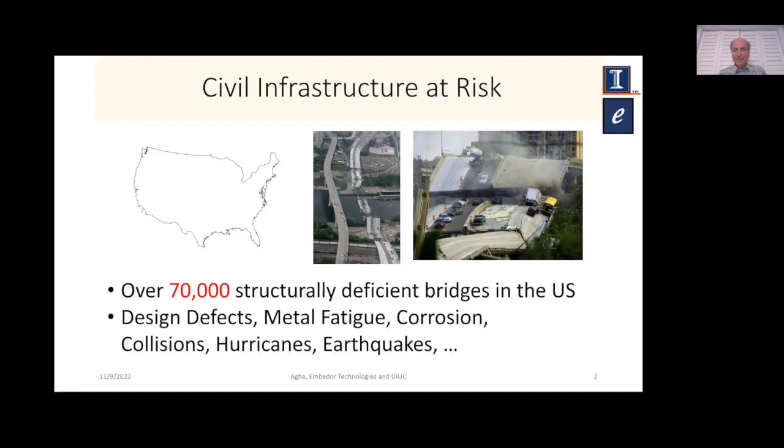Sometimes there are design defects. Over time, there's metal fatigue, there's corrosion, collisions, hurricanes, earthquakes, all kinds of stresses on these systems. In fact, the American Society of Civil Engineers, because the infrastructure is aged in the US, assigns grades to bridges, and the overall grades are pretty low because the US infrastructure in particular was built after World War II.

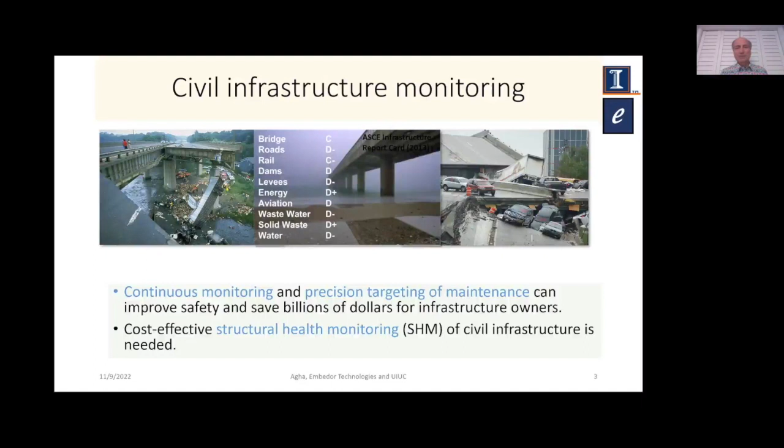But it's a problem around the world. As you know, bridges have collapsed in Italy and India and in many other countries as well. So what we want to do is to continuously monitor and precision target, figure out where the problems are by turning these structures into smart structures. And we believe that if we can cost effectively monitor the structure continuously, then we can identify problems and improve safety.

So our first major project was in Korea, actually. We instrumented this bridge with an army of sensors and got a lot of publicity in The Economist, in New York Times, and other press. And basically, it turned the bridge into a smart structure. So the bridge could monitor itself through these sensors and notify us when there was an issue.

In fact, there was a hurricane during our deployment. So this was an experimental test deployment for about an 18-month period or something of that order of magnitude. And what they found was that there was a typhoon that went through, and we were able to actually record the response of the bridge to the typhoon.

So let me set a timer here so I know the time.

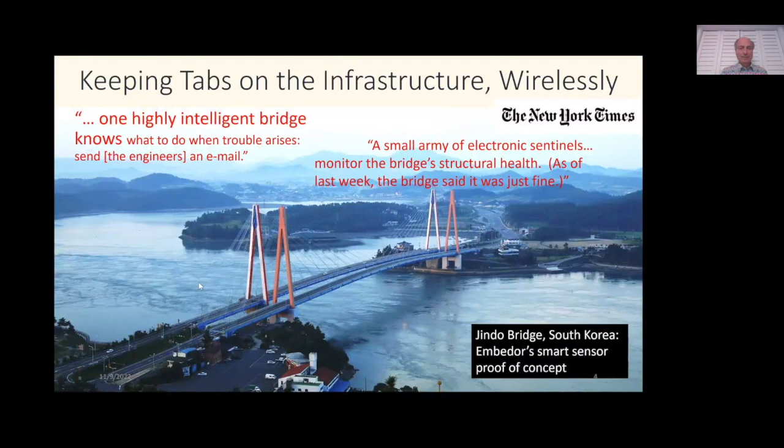Right. So this bridge was able to actually tell us how it was doing and responding during the typhoon. Sorry. So how do we turn infrastructure into smart infrastructure? As we did with this bridge, if you attach sensors to devices, objects and structures, elements that are connecting and so on, then you can tell how the performance is.

So for example, in my condominium, I have leak sensors next to every sink and every appliance. And this leak sensor then can transmit data. It figures out if there is water anywhere, because I'm up on a high floor, so I don't want to cause damage to lower floors when I'm gone. So it sends smartphone notifications if there's any leak in the washing machine or in a sink or some pipe.

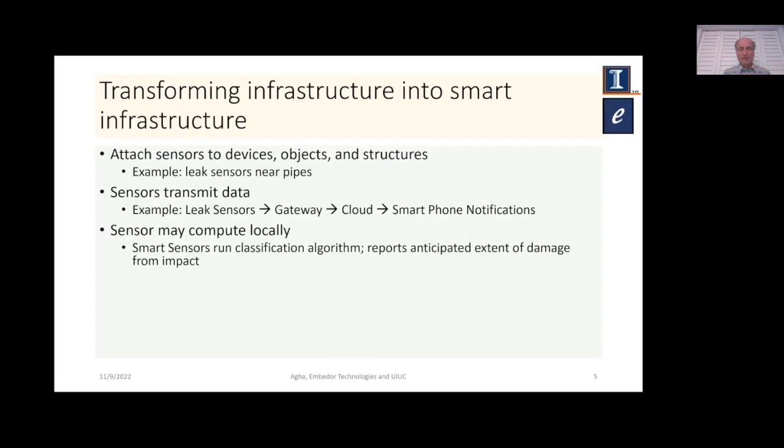These sensors may compute locally, so they may run classification algorithms and report anticipated damage, extent of damage from different events. They can also network, and so in case of, say, the typhoon with the long span bridge, the sensors could talk to each other and see how they were responding relative to each other, and this kind of correlation can help estimate the behavior.

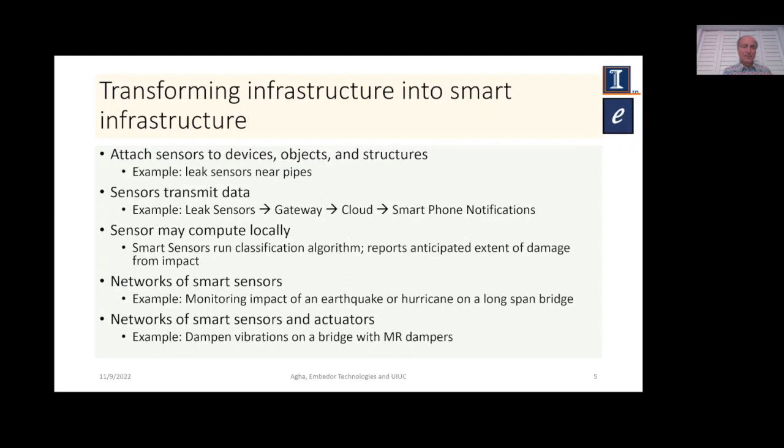And we, in fact, have done a research project. Much of what I'll talk about today is stuff that we've actually deployed and developed and is ready for commercialization. We also have done some research in damping vibrations on bridges using these MR dampers, and there we would connect sensors to actuators and actually prevent damage from happening in case of typhoons and earthquakes and so on, to the extent possible.

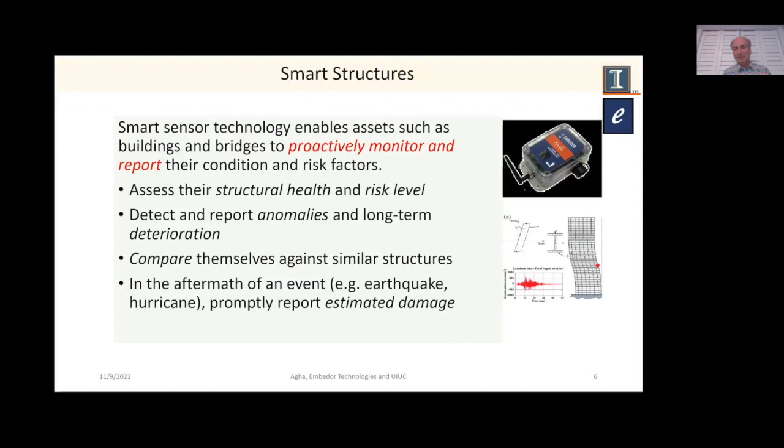So what does a smart structure do? It can assess the structural health and risk involved. It proactively monitors the condition and the risk factors. It can allow you to then take the data, compare it with similar structures, and when there is a catastrophic event, such as an earthquake or a hurricane, it should be able to promptly estimate the damage.

Now, there's a number of programming challenges in sensor networks, and these programming challenges are that these sensors have limited onboard compute capabilities, so you have to use them efficiently. You have limited energy availability. In case of, for example, this Jindo bridge deployment and other deployments, we've used solar panels, and these solar panels charge the sensors, but then you have to be very careful in terms of the management of the energy.

We had one deployment in Dubai, and in this case, the temperature becomes so hot that it's unsafe to charge. You only have a couple of hour window in the morning. So you have to diligently manage the energy, because if you let the energy go to zero, then you can't talk to the sensor.

And you also need to be able to charge it effectively to get the sensors to work. So you have to do time management on the sensor and things of that sort. There's low communication bandwidth. You need real-time communication. Data becomes obsolete. These are some examples of the programming challenges.

We use a number of techniques. One of them is edge computing, because centralized algorithms are not scalable. Networks can be slow, and you can be in remote areas. You might have very reduced bandwidth if there's a citywide emergency and you have tens of thousands of installations of sensors on different structures.

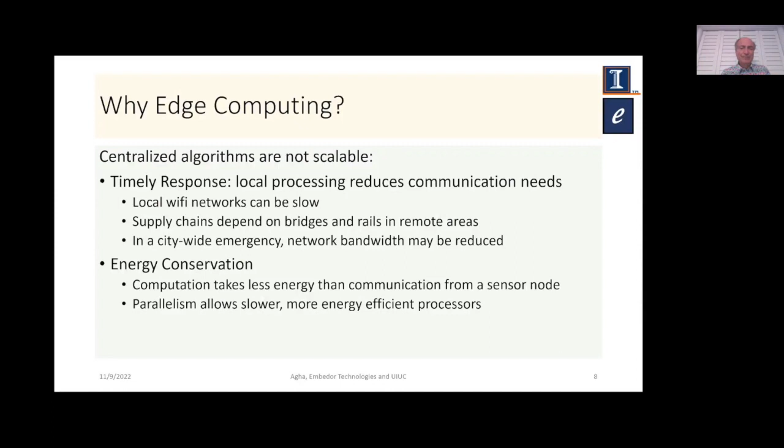Just to give you an example, Berkeley did a project on the Golden Gate Bridge, and it took them 10 hours to transmit 80 seconds of data. There wasn't any local processing happening. In the 10 hours, there's a huge battery problem in terms of charging it, and it could very well be that you run out of energy.

In the case of the Jindo Bridge, we had twice as many sensors, maybe 107 nodes, and what we did was decentralized data aggregation. Communication happened locally in communities, and then the information was transmitted and processed. This kind of distributed computing allowed us to transmit the data within minutes.

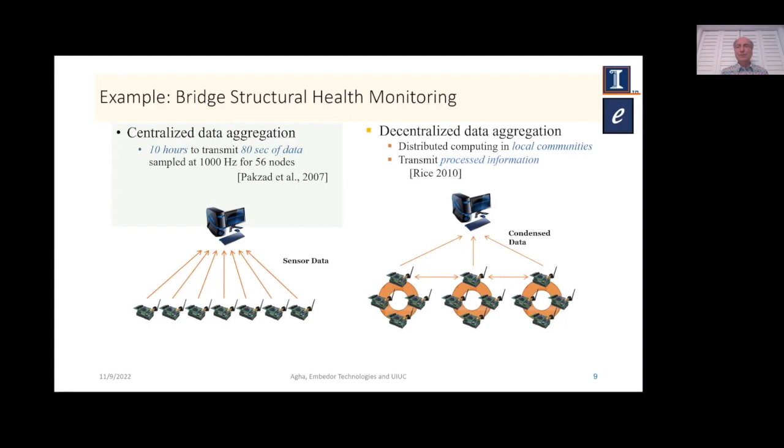My personal background is in computer science, and I developed the actor model of distributed computing that a number of people have worked with. This book was the classic book on actors, published by MIT Press. It's been used for Twitter and Facebook chat and LinkedIn and a number of other systems. The Orleans framework is an actor framework in the Azure cloud for Microsoft. And there are languages such as Erlang and Akka, a framework in Scala.

This kind of framework allows you to think in terms of distributed computing. And thinking in terms of this, we can develop services. These services provide the ability to put together different applications very quickly. Some services are foundational, for example, reliable communication, time synchronization, numerical libraries. Other services have to do with the network.

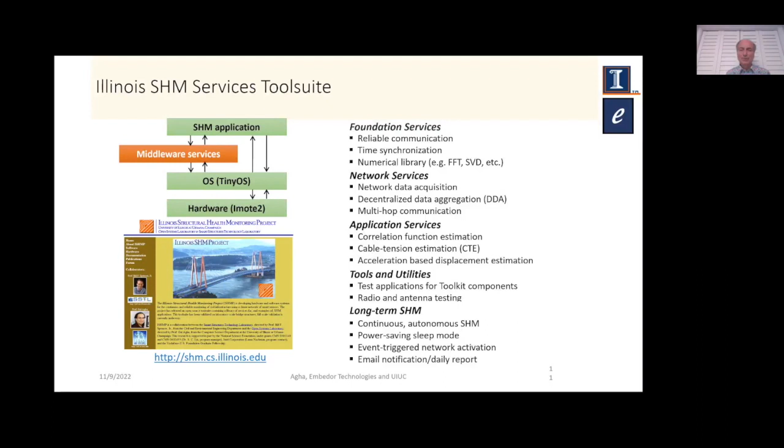Then there are application services for structural health monitoring, correlation functions, cable tension estimation, and displacement estimation based on the accelerations. We have a number of test utilities, and then there are power saving modes, reporting, and things of that sort. We did the earliest work in TinyOS. Now we use essentially a version of Unix to do our work.

I'll give you an example of a few of these services. Clock synchronization is one service. You have a beacon that exchanges time, but there's an error based on variations. You get a clock drift. Also, your processing is asynchronous. Even though the time of flight for a radio signal is negligible from the point of view of what we are recording at 100 hertz or something,

we can get down to microseconds, but the operating system is not a real-time operating system because that would be very expensive to have. So there are asynchronous delays, and we have to develop techniques to overcome that. Clocks drift over time. If you keep resynchronizing constantly, you're going to use up energy and the sensors' time. So you can do clock drift estimation.

We did frequency scaling, and frequency scaling sometimes leads to losing the clock synchronization. The frequency scaling is to save energy, so things have to be done in a way that carefully manages the energy to provide the right precision and error tolerance.

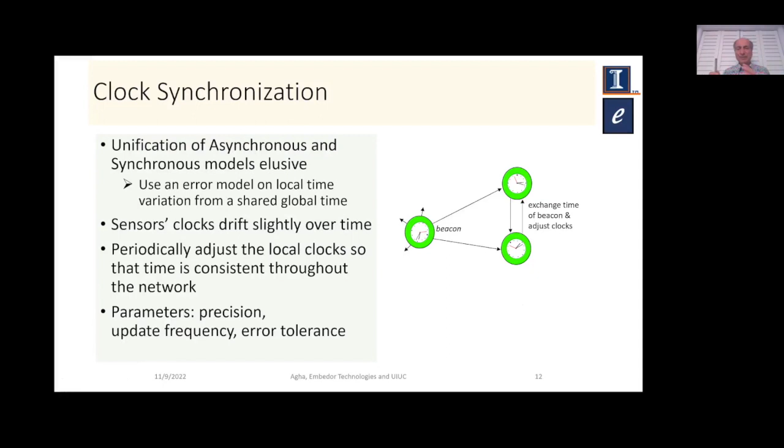After this synchronization, there's also data synchronization. For example, if you have a wave going through and you're trying to correlate two sets of waves from sensors that are nearby, you can use the physical structure to figure out errors in the data in the time domain. And we've done that.

There's fault tolerance. Large numbers of sensors means that you're going to have faults over time. So it becomes necessary to follow these faults and be able to cope with them.

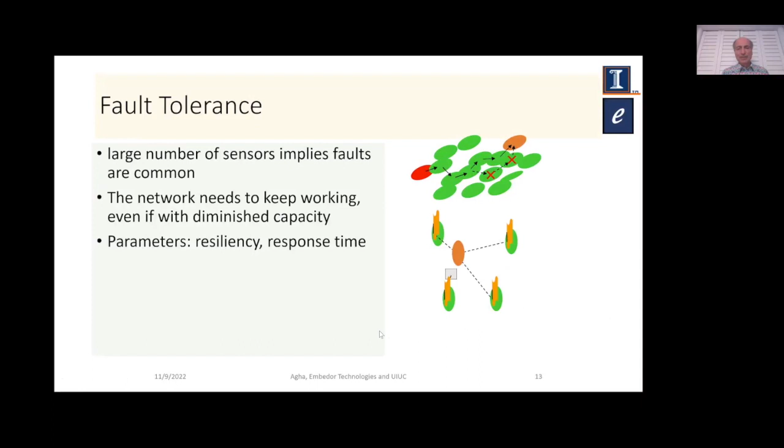Data aggregation is another key one. You want to process, for example, classification algorithms to compress the data instead of sending all the raw data, especially for a timely response. You can process this data, send off a response, and if data is needed for audit purposes, you can store it locally and send it when it's convenient, when you have enough energy or bandwidth.

This means running the classification algorithm locally on the sensors. That's why they're smart sensors and not just sensors getting the raw data. In other cases, as I pointed out, for the coordinated computing aspect, we use correlation function estimation. In the Jindo Bridge, we did distributed computing. This can create orders of magnitude efficiency.

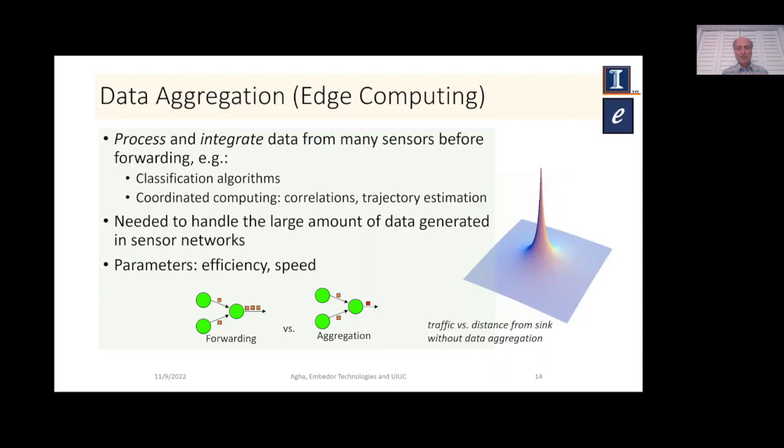So we developed these solutions at the University of Illinois, and then we wanted to get them used in the real world. So we founded Embedor Technologies, a startup with my colleague Bill Spencer and my former graduate student Kirill Mechitov, who got his PhD with me and is working on the team.

And so we've been working with these solutions now for a number of years. The project started around 2001-2002 timeframe at the university, and about 14 years later, the last 6-7 years, we've been increasingly commercializing different solutions. Some of these images you see here are in fact some of the deployments we've had, pairing real-world experience with the SHM research.

So what is the goal of IoT for structural health monitoring, and what is the value proposition that you would want a startup to do? You want to predict structural problems using real-time and historical data. This is something I hinted at right at the beginning of the talk. You want to prevent damage, so preventive maintenance, figure out where there might be potential damage or weakness. And this will help you enhance safety.

So if you are monitoring continuously, you can send notifications to engineering personnel or whoever the gatekeeper is, the traffic engineers and others. By providing an expedited response, you can also say things are safe after a catastrophic event, or things are not safe, because inspecting every structure after a catastrophic event, if it's a widespread event, is a very labor-intensive process that can take a very long time, and basically shut down important infrastructure for your transportation requirements.

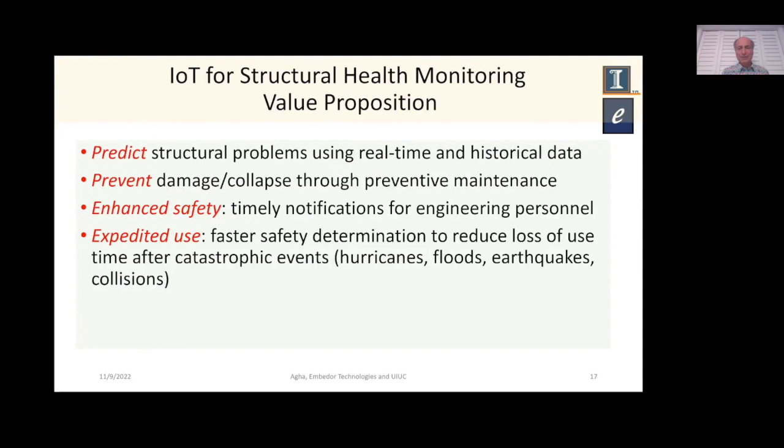So some of the examples of deployments we've had are rail and highway bridges, the world's largest Ferris wheel. Any large structure, any large physical structure, we can instrument that has vibration or strain or other sort of sensing that can tell you there might be a problem. During construction, they instrumented this Ferris wheel, for example. The Jindo Bridge that you see, a bunch of other bridges we've done. One of them is shown on the left, a train bridge in this case, truss, both wooden and steel.

And we've also instrumented buildings for earthquake damage, in this case, in partnership with Zurich Insurance Group. We have a global partnership that we're working with.

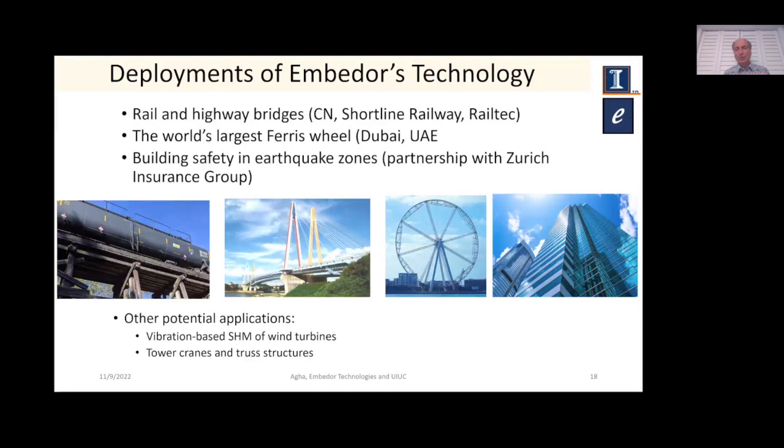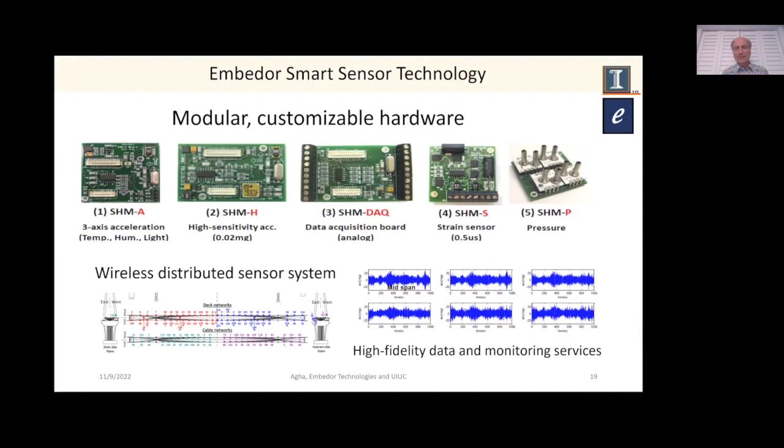So what is the technology? Well, the technology has got several parts. There are sensor boards, and these sensor boards are getting acceleration and certain other things like temperature, humidity, light, and so on. So you can adjust your sensor readings based on local conditions, which can affect it. For example, if you were trying to get the cable tension, you know that the temperature is going to affect the cable. So knowing the temperature locally at that point is important, and the sensor can help you do that. We have also developed data acquisition boards, strain gauges, pressure sensors, and we can provide these readings. So there's this customized hardware that's been developed, and this allows us to do wireless communication through a radio board, and provide high fidelity monitoring and data acquisition.

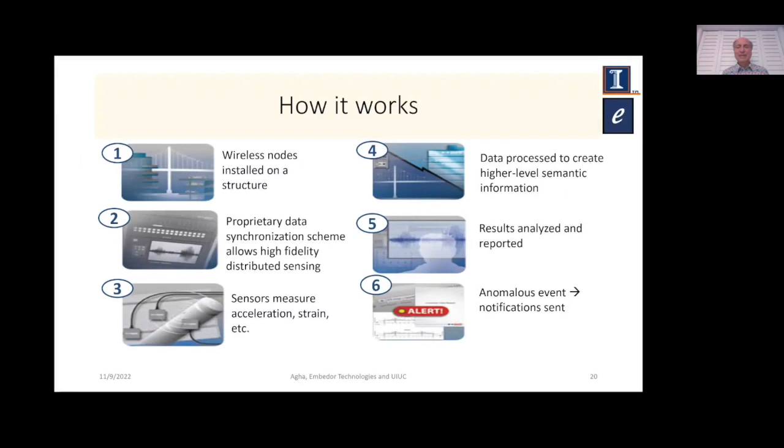So essentially, there are 6 steps to our process. You take the wireless node, so you don't have issues of wiring, and install them on a structure. These can be installed via magnets or screwed in if the structure allows. Obviously, in a bridge, they don't want us screwing in things, but we can use magnets that attach to the steel structure. Then we use data synchronization schemes and high fidelity distributed sensing. Sensors can measure acceleration, strain, etc. We process this data to create semantic information, analyze the results, and then if there are anomalies, we send notifications to the right parties. So that's the basic idea.

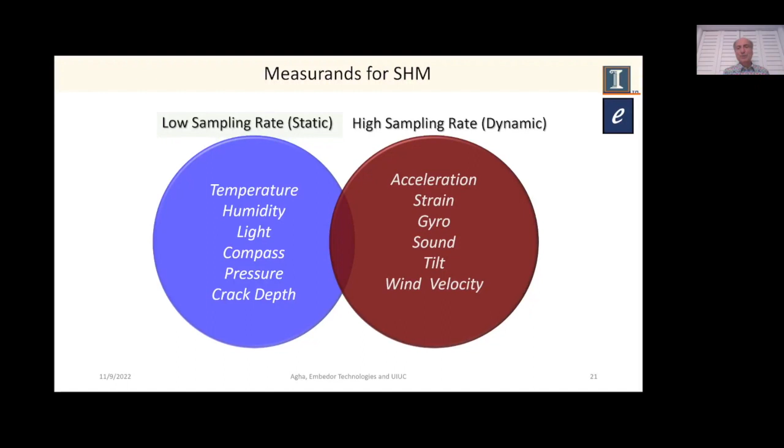And here are the 2 types of measurements: things that have to do with statics, temperature, humidity, light, compass, things of that sort, which do not depend on the motion or changes in the structure, in the movement of the structure. Then there are others which have a higher sampling rate, more hertz, more data, things like acceleration, strain, and so on. Wind velocity was something that we were recording locally, and in fact in the typhoon, so we knew exactly how much wind hit that bridge in Jindo.

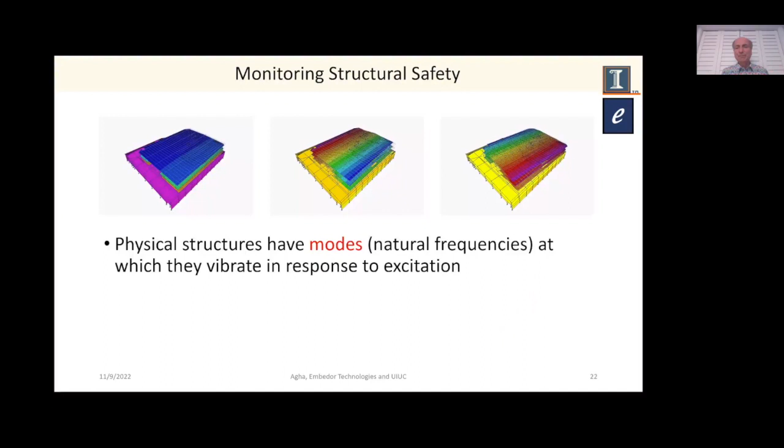So monitoring structural safety, basically you look at the physical structure, and every physical structure will have modes. These are natural frequencies of movement in various dimensions. If it's a building, you'll have these three movements. If it's a bridge, you'll have up and down movement as well. Buildings are fairly grounded, so up and down movements will be relatively minor. So in response to any excitation, you'll have these physical movements, and from these movements you can make estimations.

And if things were responding as they were supposed to, you build a model of the structure - in this case the cable tension has a simple model and specs, and you can see if things are following the specs. Then there's more complicated models made of the individual elements. These elements you can build computationally, the dimensions, the mass, stiffness, and they do this at design time. Based on the structural plans, though, what actually happens may not reflect the behavior of the structure.

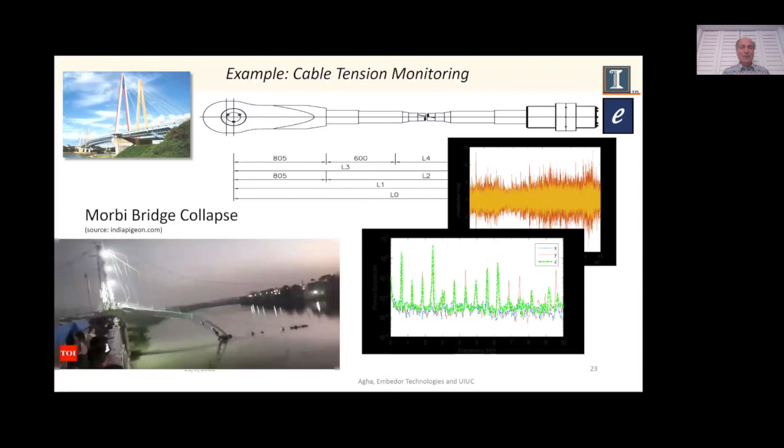We don't know for a fact, but I imagine the engineering firm, the design firm that planned the Morbi Bridge had certain estimations of the cable tension, of the weights that would go on it, and how the movement would be. However, the reality can be quite different. Because of flaws in the construction or whatever other issues that might arise, poor materials or weight limits that are getting exceeded, you can have behavior that does not accurately reflect the model.

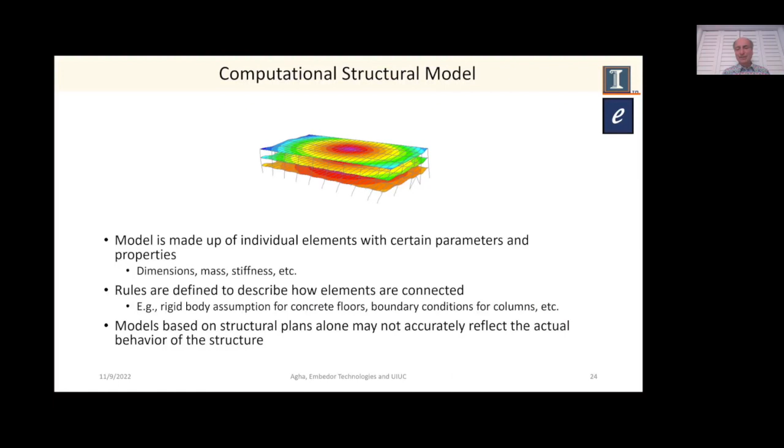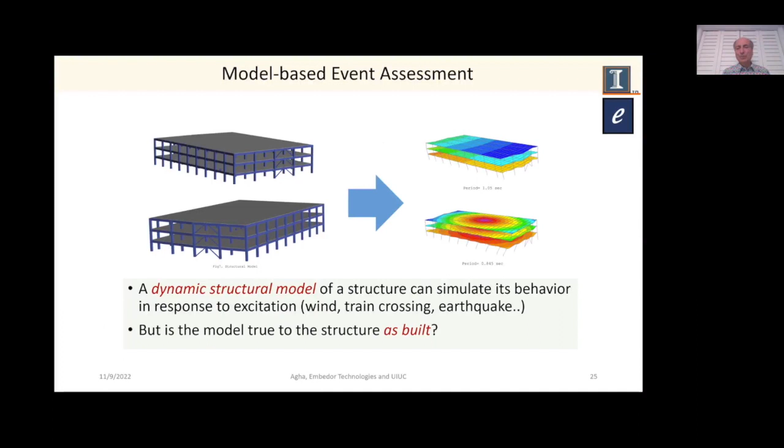The model does not necessarily reflect what the structure is. So what we do is then we can do the dynamic excitation. We can see with wind or train crossing or earthquakes - we can simulate what the response should be and see if the model is true to the structure as it's built.

So what this does is allow us to update the model and say, okay, really what the bridge is doing is the following, or here are the issues, or with the building, it's not behaving as it should. It should have been more rigid, or it should have been less rigid. And so in response to just a high wind, for example, its behavior is not what it should be.

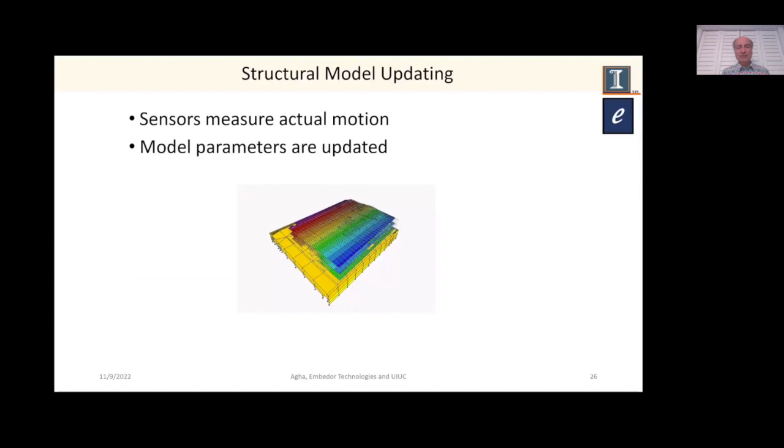These are what the model parameters instead look like, and therefore you can propose things that say something about the state or the condition of the bridge. So we can do this at any point in time - look at the displacements, look at the measurements, and we can track changes over time. This could be periodic measurements, or it can be event-triggered measurements, and then look at significant events that are changing how things may behave.

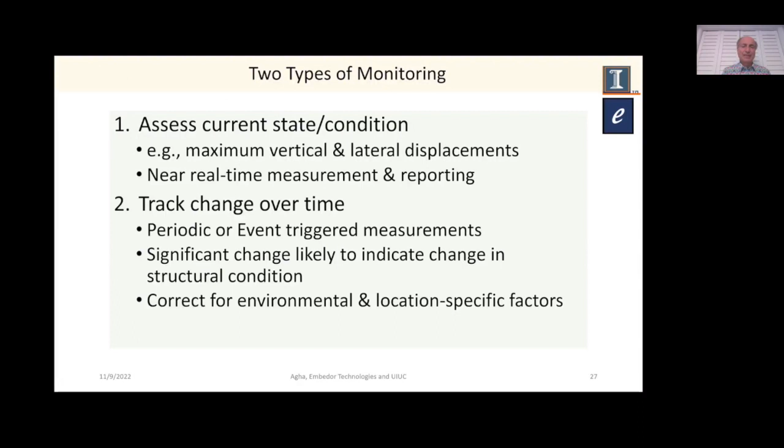These significant events can cause dislocations, and these dislocations in the structure can then be detected as issues that have cropped up. You have to correct for environmental and location-specific factors. I mentioned already, for example, the temperature will affect how the cable is behaving. So these kinds of factors, if sunlight is shining or things of that nature, seasonality - they will have an effect.

Now, energy, as I mentioned, is a key factor. Let me give you - and this will lead to the final example that I will present in my talk. You have events that are being triggered, but you cannot afford to not sense in response to, for example, the typhoon, or if there's an earthquake. We've had sensors when there's an earthquake, and we said what the response of the structure was. We have deployments in Mexico City, for example, where there are frequent earthquakes, and we then can say how the structure did.

So if you have the sensor on continuously, then you have to power it. But some of the deployments will be out where there is no source of AC power. Even if there's no source of AC power, some earthquake could wipe out a station, or other reasons, a hurricane could wipe out a station. And then you want to go into a mode where you're not constantly having the sensor on, because it will consume power, and within a few hours, you won't have any sensing capability.

So what we have done is to create a low power trigger sensor. And what this low power trigger sensor does is continuously record data. This data is just recorded for a small amount of time, say 80 milliseconds, and then it's a continuous buffer, so it doesn't store the data.

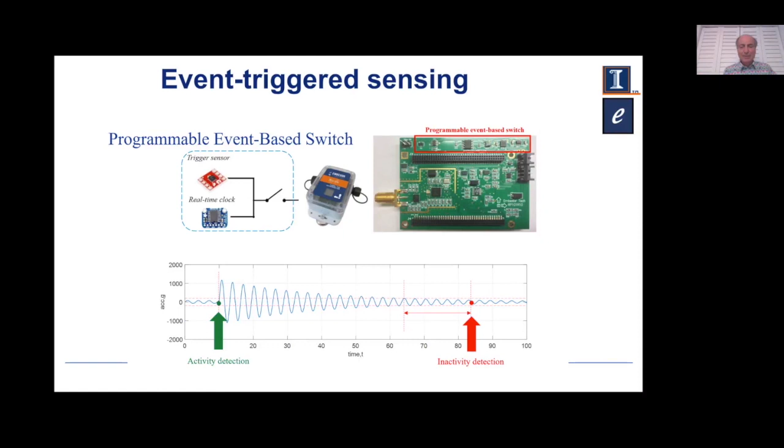So this small window then wakes up, so the data from this trigger accelerometer, and then the high fidelity data. So we get this triggering behavior.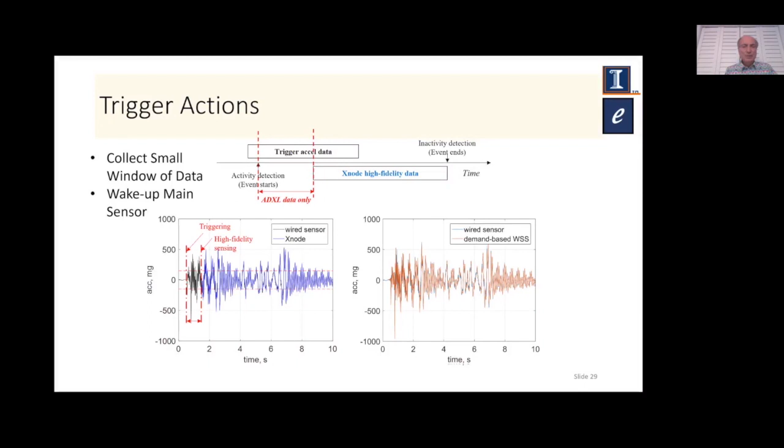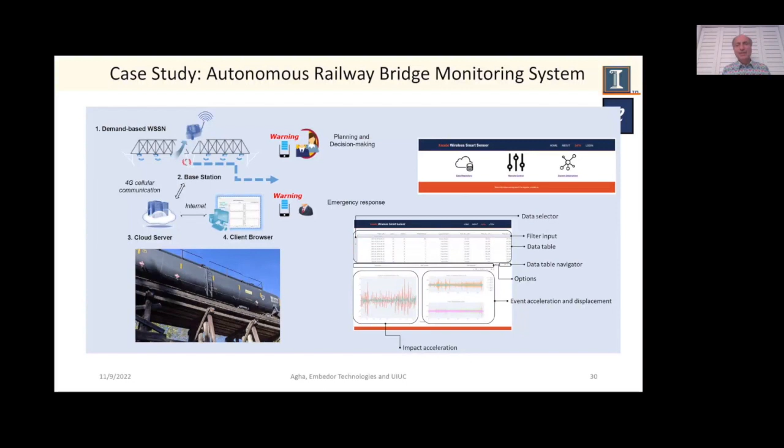So we've used this in railway bridge monitoring systems. If a train is coming by, you want to trigger the accelerometer—it's in the middle of nowhere, and say a train is coming, let's start recording and see the response of the bridge. So one case study was this autonomous system to record the rail bridge behavior with wireless sensors, and if something happens, you would trigger the emergency response.

In this case, we also use strain sensors. What strain sensors can do is tell us about the track condition, because you can measure the strain. If there's some issue with the wheels, you'll have the vibration data as well as the strain data. In fact, you can even measure the load of individual train cars as they pass by—if it's been inaccurately recorded in the manifest, you'd be able to detect it.

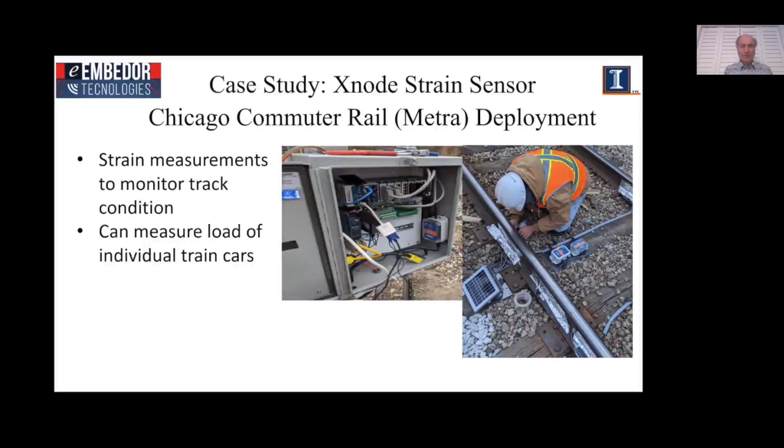You can see our sensors, the blue boxes on the ground there, and in the box on the left. You can also see the solar panels. So there's the installation—this was done on a commuter rail line in Chicago, where we are situated.

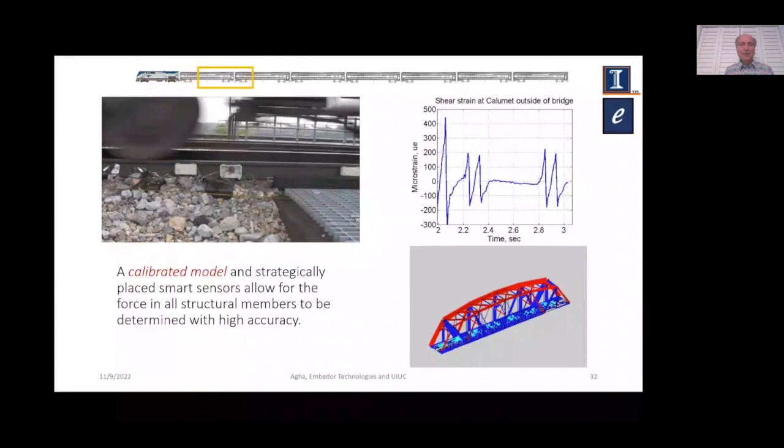As the train is going by, the accelerometer is triggered, and you can record—in this case, it shows the shear strain at the Calumet Bridge, just outside the bridge. The recording is being done, and this tells you what the force is on each structural element.

You have these sensors all along, and you can tell what forces are being applied and how the bridge is responding. Here's an example of a different steel truss bridge, and we marked in red the places where we were doing recordings. We found that some members, shown on the bottom right marked in red, looked like they had issues based on the sensor data. The inspection report showed that the truss on the west side had multiple members with section loss, while the east side had no loss. So we could compare the data of the two sections and identify the problem—a 15% loss, 40% loss, 15% loss—and that tells you exactly where to reinforce it.

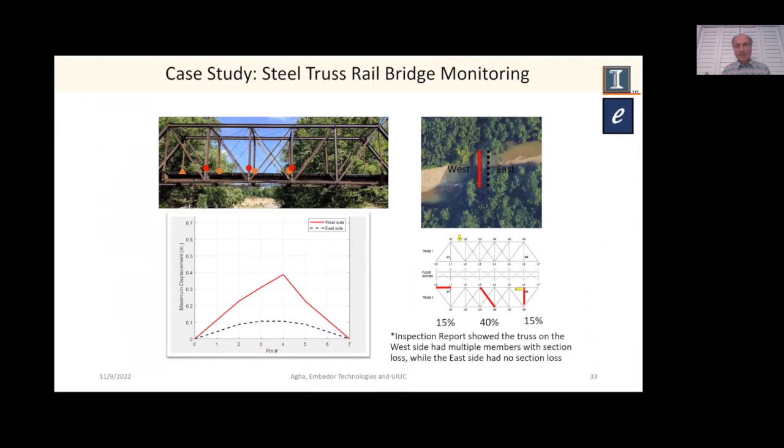This is being done continuously, so we can tell what's happening. We can look at the displacements over time and see if they go above a certain level. Green means everything is fine, yellow means it's in a problem zone, and the red zone—showing up pink on my screen—means it's dangerous and things should perhaps be shut down. We take multiple measurements, use statistical methods, and compare different behaviors of the bridge on different sides, using symmetries and a number of techniques.

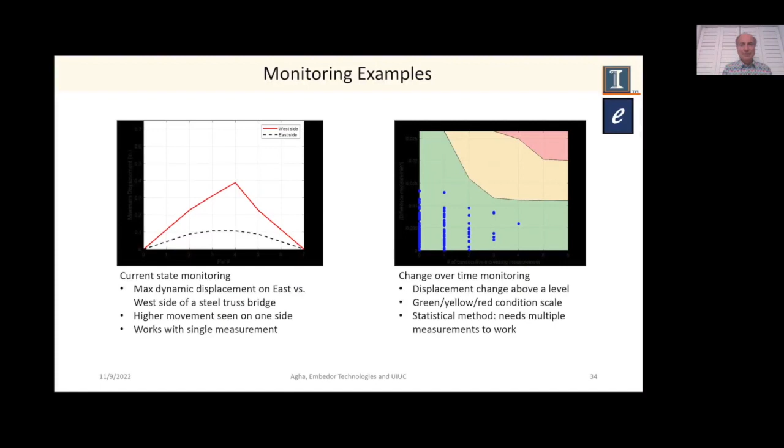Now, the final example I'll give, also related to bridges, is overheight vehicle collisions. These are a critical problem all around the world. If you look at bridge failures—this study was done in the US—estimates show 24% of all bridge failures are caused by vehicle collisions with the bridge. This also happens with river bridges, where barges sometimes collide into the bridge's columns. 50% of bridge closures are also caused by overheight vehicle collisions, and when there is a failure, it can shut down a transportation artery for many days.

On Lakeshore Drive, a major artery in Chicago—US Highway 41 is the official US highway name for it—it was closed for a period of time just by accident, because some people working on the lights saw damage to the structure there.

And if it hadn't been seen, it could have led to a catastrophic failure. It had been inspected, so the inspections are every two years, whereas if you're monitoring, you'd be monitoring continuously. In this case, just through serendipity, because the workers happened to be there, they noticed there was a problem with the structure, and they had to close down this highway for many days to repair the bridge. So it's important to figure out what's happening.

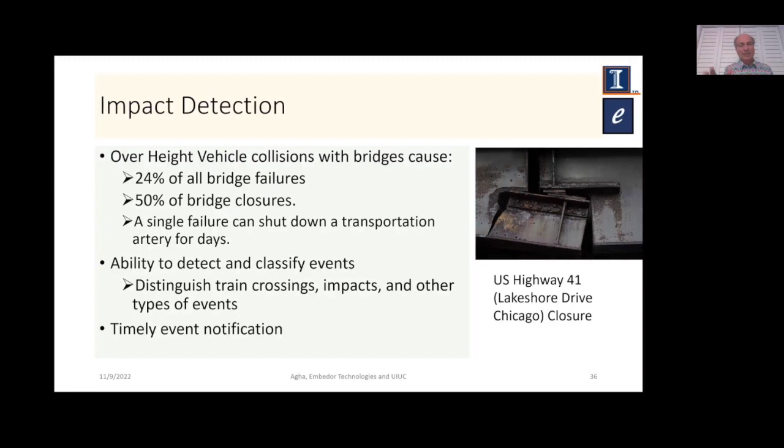Now, of course, when you have a bridge, it might have train crossings on it and traffic underneath. It can have impacts. The impact can be significant, or it might not be significant, it might be a small scrape. You have to distinguish it, because the bridge will also vibrate if the train crosses. And then you want to notify about the event, how significant it was: if something just touched it and stopped, if something hit it hard, if something scraped it back and forth, and so on.

So this is a global problem, not just in the US. There's examples in the US, and I was vacationing in Ireland a few years ago, before the pandemic, and here was a sign in Dublin: if you strike this bridge, please call this number, which is above in Irish, and call the control room. Now, the problem is that when they do this, somebody has to go out and look at the bridge, which can be expensive. And sometimes they don't report it.

If they go out and look at the bridge, sometimes the hit is not very significant, so it's taking up precious inspection time. If the hit was significant, the delay in going out and inspecting it, and then closing it, can lead to a safety catastrophe in the interim. So you basically have this trade-off and a problem, and quite often truck drivers or whoever will not call, because they don't want to slow down or feel like they will be held responsible. So they just back up and leave, and that's quite typical behavior.

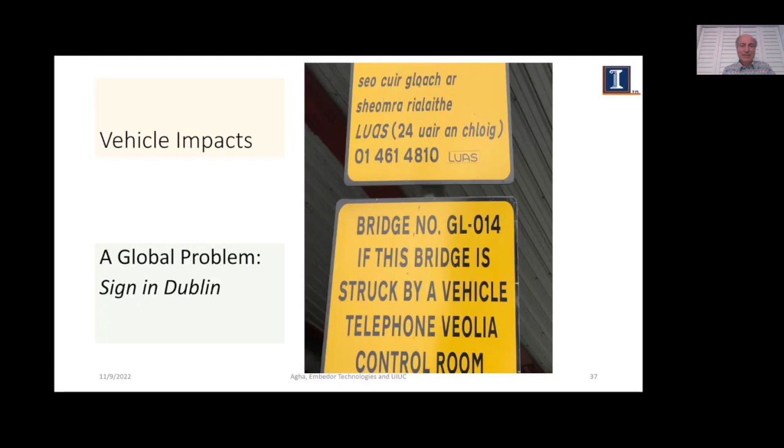So we want to know the intensity of the collision, what happened to the structure, and when it happens, and how urgent it is to inspect the bridge.

So here was an example of what we did. CN railway engineers deployed three Embedor sensors on a Class 1 bridge. This is an overpass that you can see vehicles go under. It was in Chicago, a low clearance bridge with fast moving traffic. There's some evidence of impact. In fact, you can see this beam here, which has been installed to try to get the impacts before they hit the bridge, but that still shakes up the bridge.

It turns out that even within seconds of the installation, three vehicle impact events were detected and reported to CN. CN is a major railway in the US, what's called a Class 1 railway, one of the three major railroads. So this was very effective.

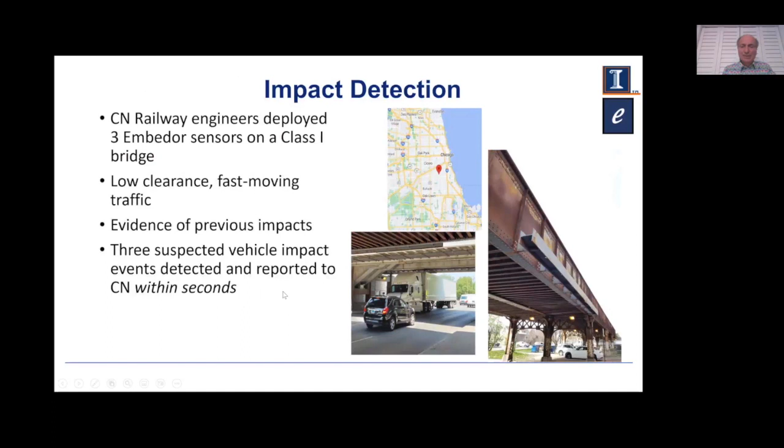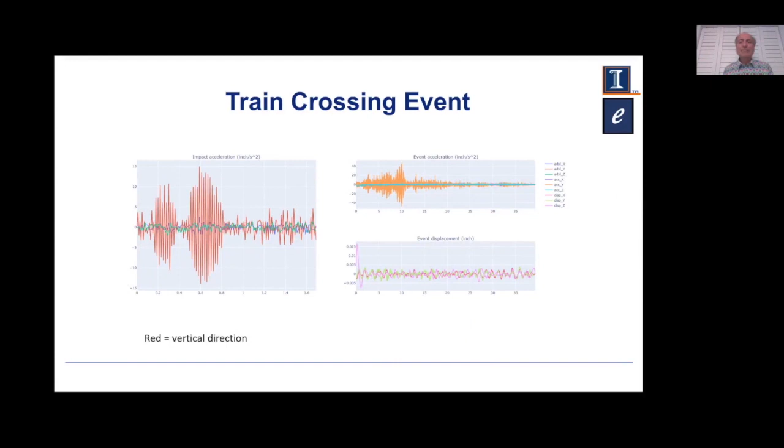So here's an example of the kind of classification that had to be done to make this effective. You have train crossings. You can see the impact accelerometer on the left. It detects the impact, the event accelerometer comes on - that's the top right - and then we compute the event displacements with what the impact of the event is. So this is with the train crossing.

Then there's a cluster of events here, and we could analyze it and realize a truck got stuck on the bridge and then tried to get unstuck. So it caused this cluster of events every time it scraped.

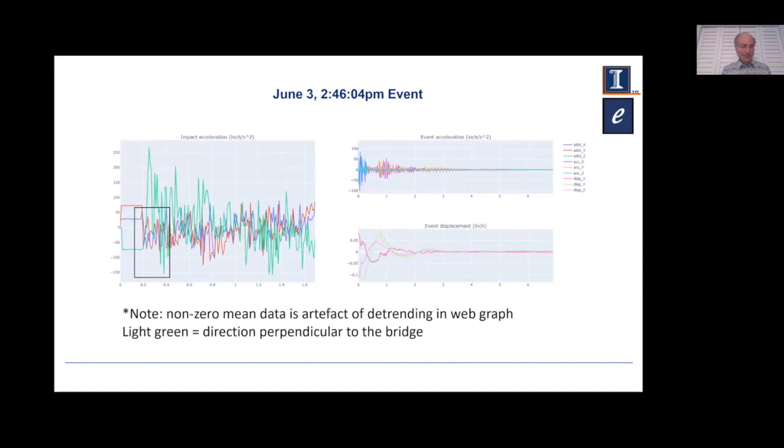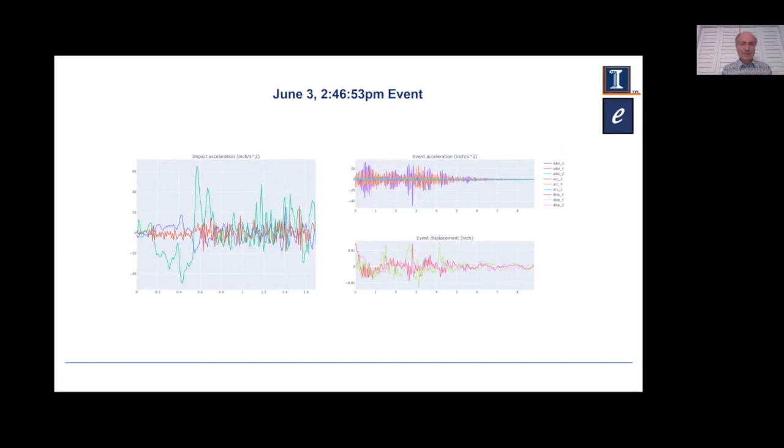And this is in all three dimensions, so the different colors here are the X, Y, Z axis. So these events can be classified, their intensity can be determined, and I believe every bridge in any city should have these accelerometers, because if it has an underpass with traffic going underneath it.